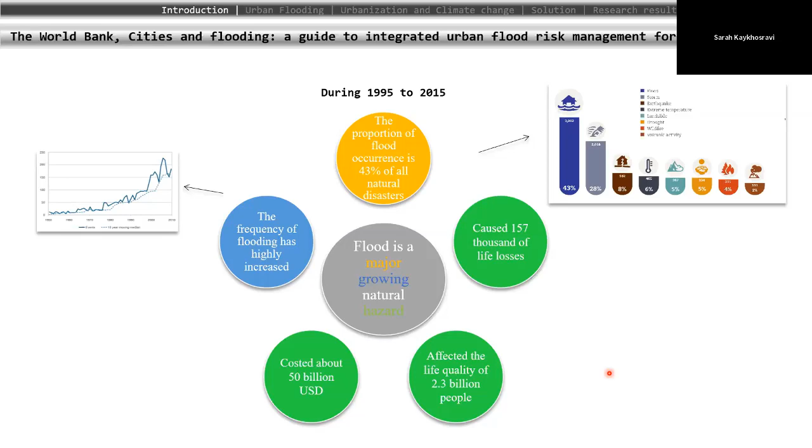And that could be around 50% of Canada's government revenue per year. One last bit of bad news is that this trend has been increasing during the last two decades of study, and it shows that it will keep increasing in the future. So the risk of flooding is increasing going forward.

Before I move to the next slide, I want to distinguish between different types of flood, specifically in urban areas. When we think of flood, usually what comes to mind is river flooding. Rivers run, and when there is rainfall, it's okay. But when there's more extreme rainfall, the river plain expands and can drown the surrounding neighborhood and those close to the river embankment. While we are calculating flood risk, we calculate that floodplain.

But there is another type of flooding in urban areas that we might usually neglect, and that is pluvial flood, which is as important as fluvial flood. Pluvial flood is related to the stormwater collection networks. In urban areas, runoff and rainfall doesn't convey downstream only through the river - it also conveys through stormwater collection networks, which are pipes located underground that collect runoff and discharge it somewhere downstream, in water bodies, lakes, or elsewhere.

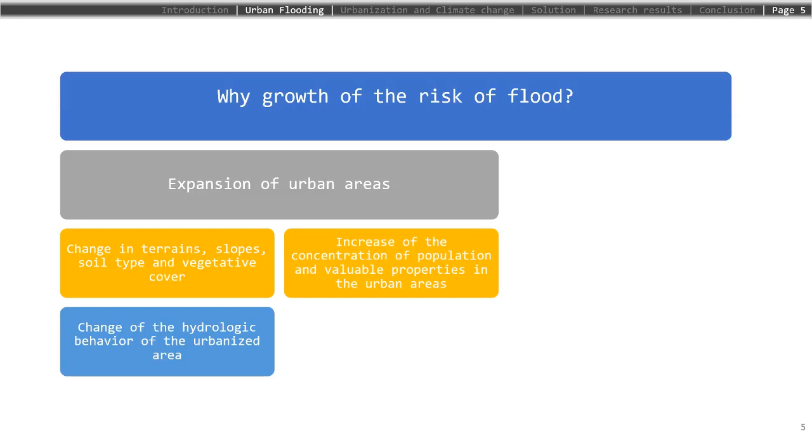In addition, there is an increase in concentration of population in urban areas. With urbanization and building cities, we concentrate population and properties in a specific, limited area. So when flooding occurs, because the concentration is high, the loss of human lives and properties would be higher.

Another important driver, which I'm sure you've heard of before, is global climate change. Climate change increases the temperature, and that increase in temperature increases rainfall. An increase in rainfall leads to extreme floods, because after high rainfall events we have higher runoff, which remains on the surface and becomes flooding in rivers and in the pipelines.

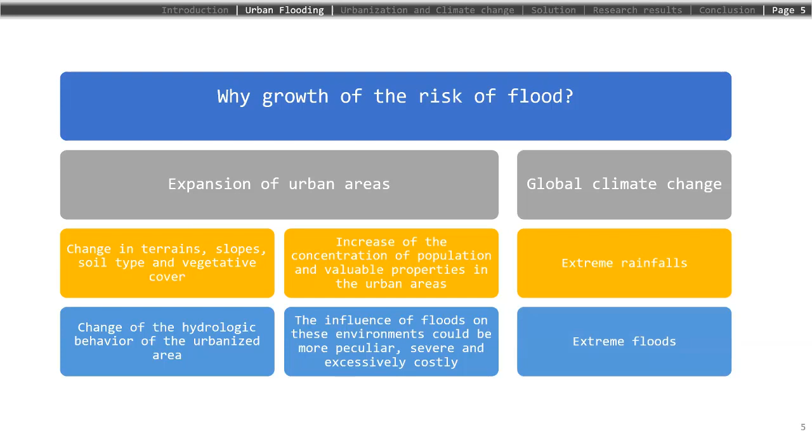Let's have a look at the hydrological cycle - this is a simplified schematic of the hydrological cycle of an area.

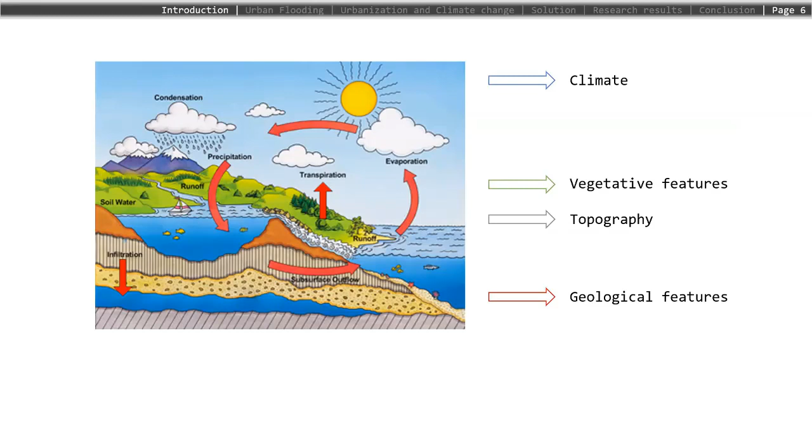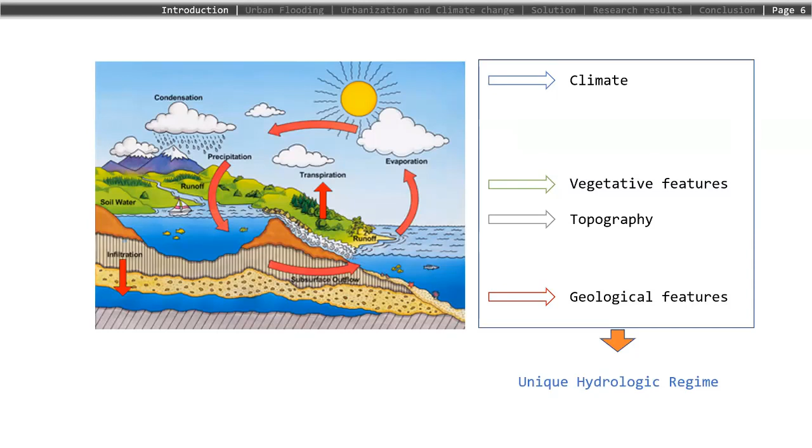With this hydrological cycle, we know that the unique hydrological regime of an area comes from different factors: the climate, the vegetative feature of that area, and the slope and topography. With urbanization, we change two of these factors: vegetative features and topography.

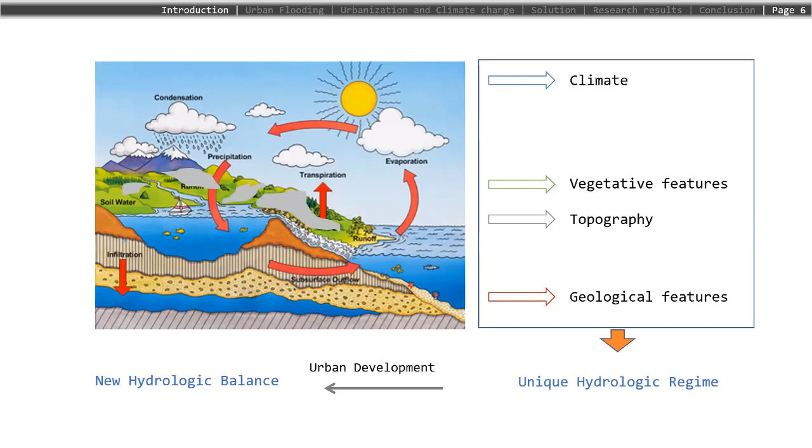With climate change, the other factor has changed too. So in all, we will see extreme rainfall and also higher amounts of runoff remaining on the surface. What can we do about it?

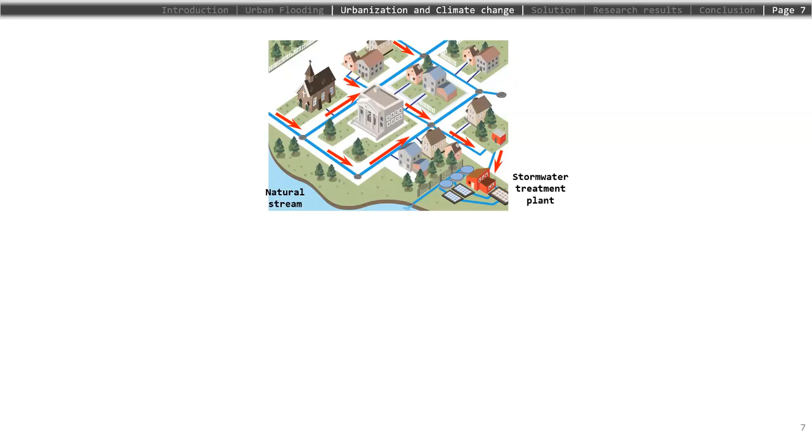One traditional approach to manage the extra runoff is stormwater collection networks. What these networks do is collect runoff from the surfaces through inlets. You've probably seen one in front of your house — little gates in the street that, when it's raining, the runoff goes into, and this runoff is carried downstream and discharged very far downstream into natural streams, a stormwater treatment plant, or some designed location.

However, these stormwater collection networks, or SCNs, have been designed for years, from ancient times to now. They're well known and well documented, but there are some limitations and problems with them. One is that they are pipes designed for limited capacity, so when we have extreme rainfall, they cannot convey more than what they were designed for.

That is one specific problem related to these SCNs. With age, these pipelines can develop cracks, deteriorate, and age. With aging, they may encounter limited capacity due to blockage and sedimentation. All these aging problems can lower their capacity.

Also, one environmental challenge with these SCNs is that in the surface of urban areas there are pollutants, and with runoff and rainfall, those pollutants — from car grease to fertilizer and many others — can be washed off and collected through these pipes and discharged into streams. That is one other criticism toward these kinds of networks.

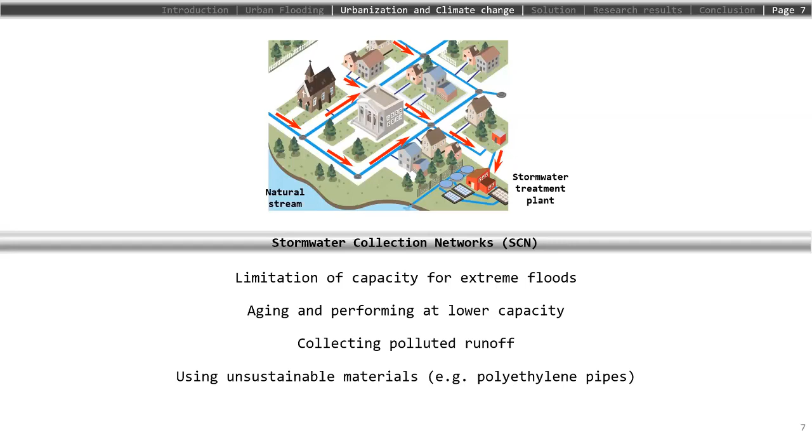Can we build lots of these stormwater collection networks? Can we add more and more pipes? What would be the smart solution to help runoff and flooding management and preserve the environment at the same time?

So, like I explained with urbanization — in the natural status of the environment, when there is rainfall, the soil is pervious and it's just filtered to the underground. The rainfall filters to the underground.

With urbanization, when there is rainfall, we prevent that natural infiltration process, so all or most rainfall remains on the surface. What we can do is use a solution called low impact development, which lowers the impact of development or urbanization through engineered, green infrastructure.

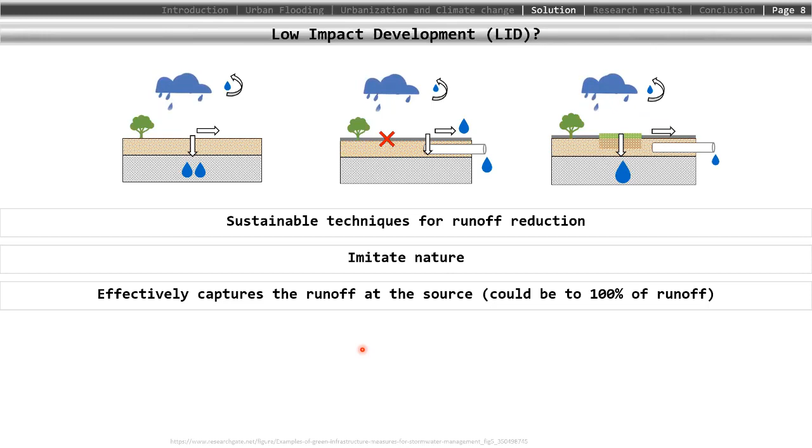This is a sustainable technique for runoff reduction that aims to imitate nature as it was before urbanization. We build infrastructure, mostly green, that captures the runoff and infiltrates it into the ground like before. It has been proven scientifically that it can effectively capture runoff at the source, so it doesn't accumulate and go into the pipe — because then the pipe has low capacity and we experience flooding.

Some examples of LID, or low impact development, are shown here. You may have seen many of them around your area or workplace. For example, the rain garden — designed to capture runoff. They may seem simple, but they have design criteria and engineering calculations behind them.

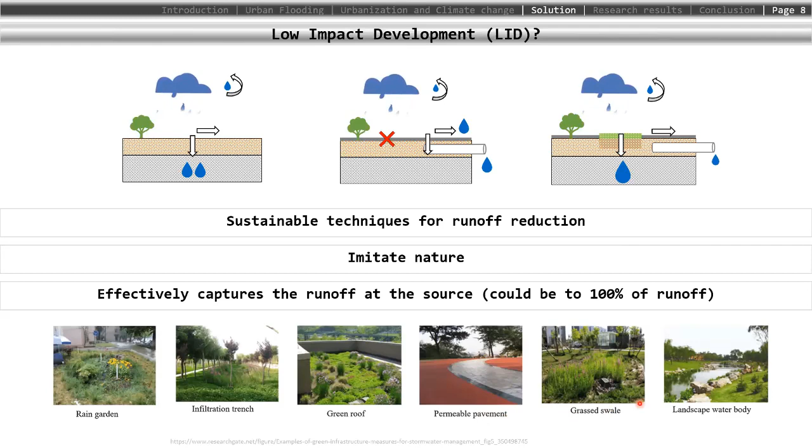There are other examples here: infiltration trench, green roofs — probably many media have covered green roofs in videos or photos. Porous pavement, which can infiltrate water into the groundwater. Also grassed swale, landscaping, water bodies, and so on and so forth.

One thing I want to mention is that these LID techniques are the solution after urbanization has already been done.

One key point I want to stress is that before we start development, we can do a lot more to prevent runoff and flooding. These are non-structural measures of low impact development, as opposed to structural measures used after urbanization. These non-structural measures include lots of actions we can take during development to lower our risk and society's risk to flooding.

I brought some examples here, like conserving natural resources and ecosystems through maintaining natural drainage courses. We don't construct over the natural courses or very close to them, and just preserve the natural courses as they are.

And reducing imperviousness. Let's say we want to build a parking lot. We reduce the imperviousness as much as we can by narrowing the width of that parking lot and leaving the rest as soil or other pervious material.

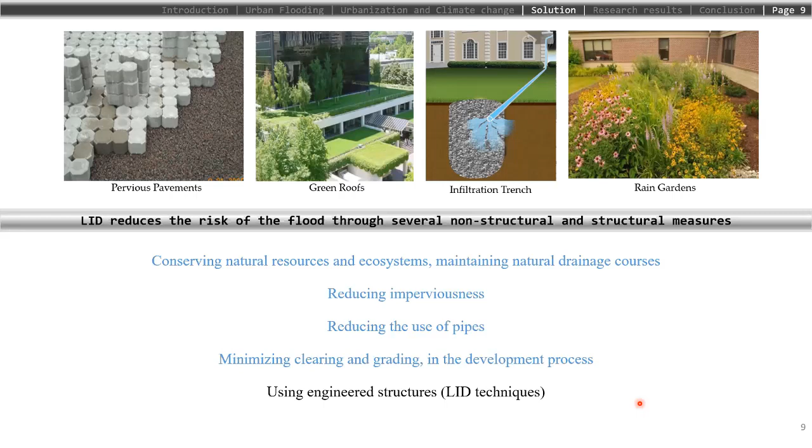And minimizing clearing and grading in the development process, so preserving the natural slope as it is, and stuff like that. There are lots of measures we can take to prevent flooding and runoff while we are developing.

This is an interesting part: these LID techniques don't only serve runoff reduction, they have many more benefits. The primary benefit could be runoff reduction, but there have been lots of studies showing that LID has positive socioeconomic effects around hospitals and educational institutes. It has been proven that LID can improve the health status of patients and improve educational outcomes, and it could be considered an amenity.

It could be a golf course or a green space for us, and it can increase the value of the properties around them.

Also, it comes with lots of environmental benefits, and these are numerous. I've listed some here, like they could decrease air pollution and also help water quality. Before, I mentioned that the stormwater collection network collects polluted water and directly discharges it into water bodies. But with the use of LID, you could have infiltration of water and improve water quality. It can also affect biodiversity, connect habitats, and provide benefits like that.

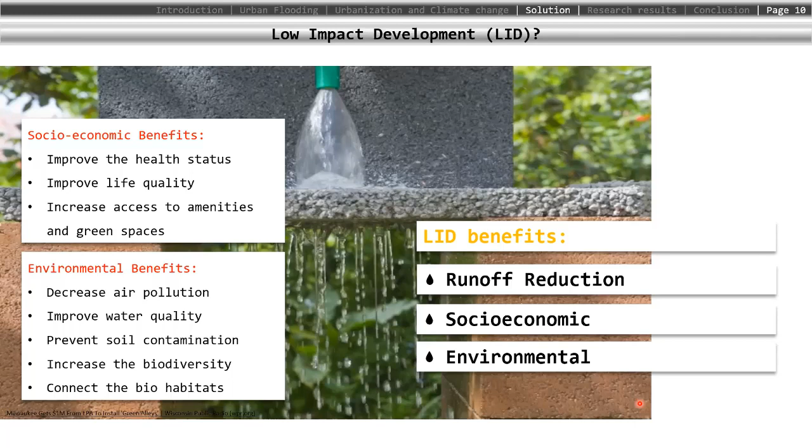Now that we know LID has several benefits, and we know that when we want to build infrastructure we are limited by budget, we need to make a decision. There are multiple types of LID, and at the same time we have multiple locations where we want to implement and build LID. So we need to think about what type of LID to use and at which location to implement it, to maximize social, economical, and environmental benefits, and also capture the most runoff.

I've done research on this, and it has been published in the journal Water. The link to the paper is in the title if you're interested.

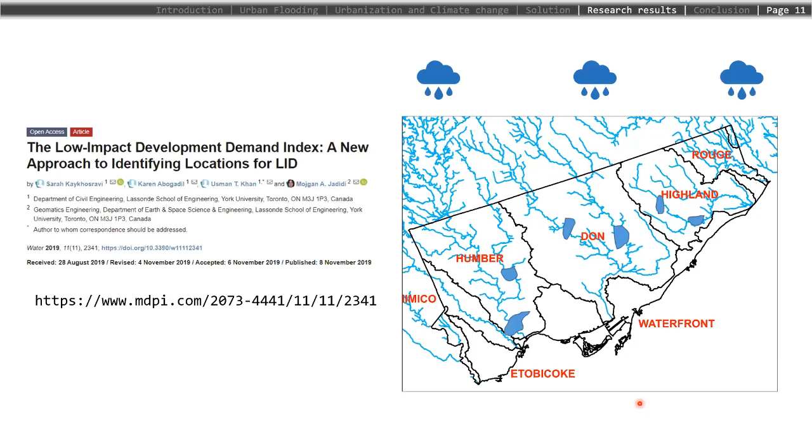In that paper, to answer how to prevent flooding if you want to implement LID, we wanted to create a map, for example for the city of Toronto, which was our case study. We wanted to generate a map that gives us the points that have the highest priority for LID installation or building.

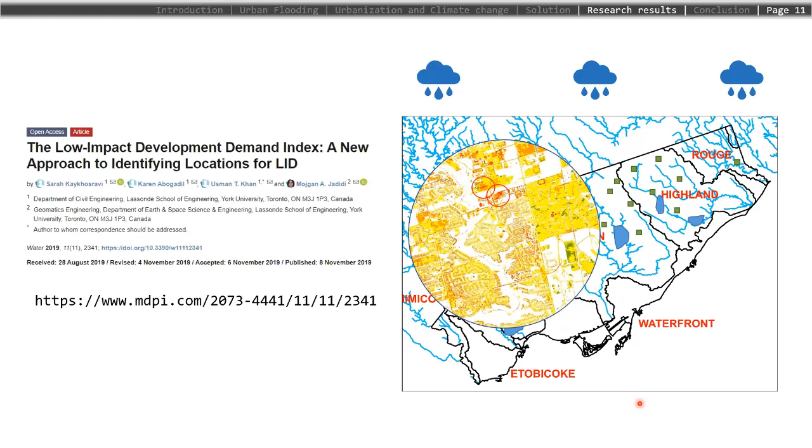I think my computer has frozen a bit, sorry.

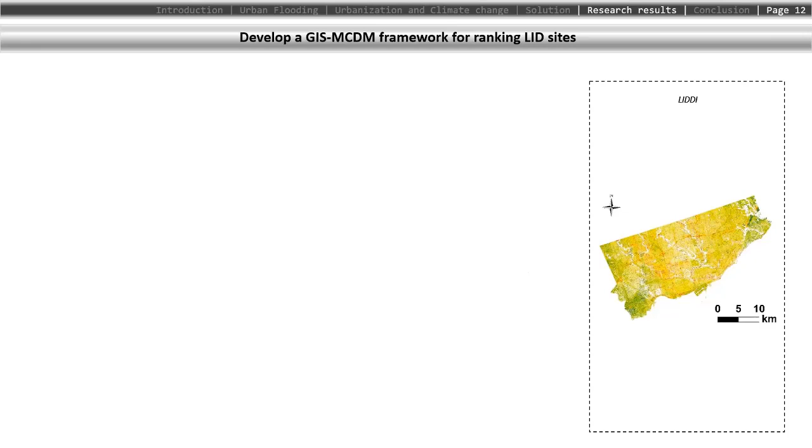This is the city of Toronto, and this is a map that we finally generated at the end of the research. How we came up with this solution, or this map, is interesting, and I guess it could change your view about how we decide where to implement LID and all the measures you need to take.

To generate such a map, we divided this big problem into three parts: the hydraulic benefit of LID, for which we generated an index; the socioeconomic benefit of LID, another index for that criteria; and also another index, a map that indicates the needs for environmental benefit of LID.

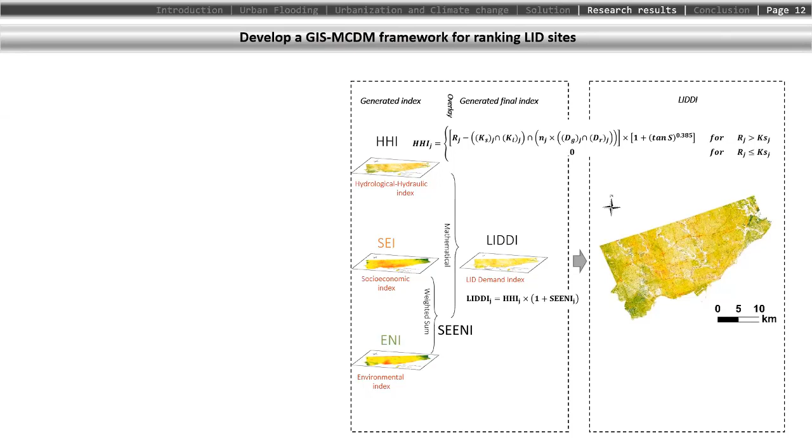These were overlaid and combined through different mathematical calculations, using a geographic information system integrated with a multi-criteria decision-making framework to come up with the answer and generate these three indices.

To generate these three indices, for each one we considered some basic criteria. For the hydraulic index, we gave priority to locations with the lowest hydraulic conductivity, meaning the locations that infiltrate rainfall water the least, and also with the highest slope, which is a factor that can increase the peak of the flow

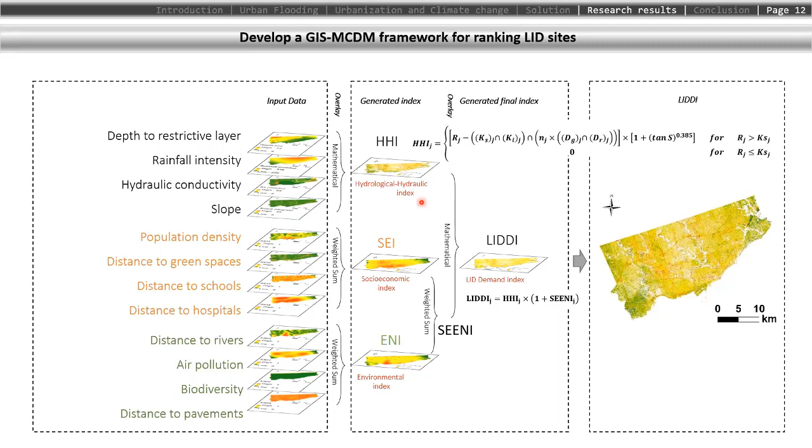during a rainfall. An example for socioeconomic is that we wanted the green infrastructure or LID to be close to schools, close to hospitals, so we gave priority to locations where we have less green spaces. In terms of environment, we gave priority to locations that have higher air pollution, lower biodiversity, and criteria like that. These criteria are very case dependent, but these examples give us a view

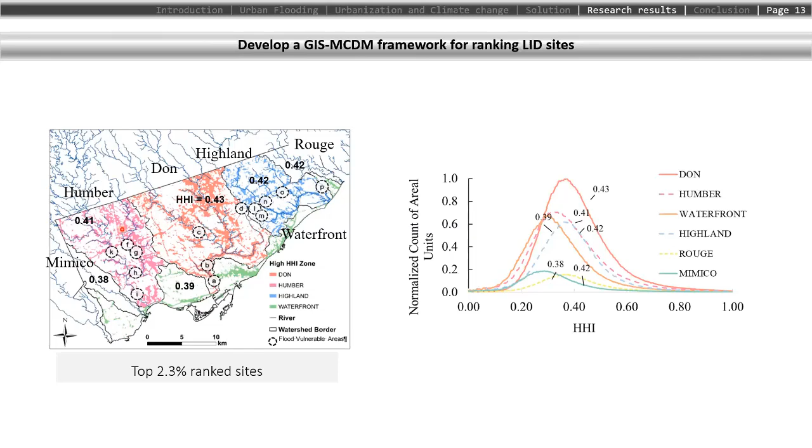If we look at the index distribution, we could see that in the Don watershed we have a very high need for LID, the graph has a higher mean. If we ranked all the watersheds in our study area, we could see that Mimico has the lowest. So Don and Humber are more critical in the city of Toronto in terms of runoff generation, and they are more urbanized in that sense.

This slide brings me to the end of my presentation, and I just had a few key messages from this presentation that I want to deliver.

One is that if you're afraid of river flooding, be as afraid of manhole flooding and basement flooding. They're equal. If we have extreme rainfall, the possibility of flooding in both is the same.

Also, LID can reduce the risk of runoff in urban areas very effectively. Take it seriously, it is a very important and effective solution.

And remember that it's not just serving runoff reduction and flooding, it is serving society and environment at the same time. Also, before we start development and urbanization,

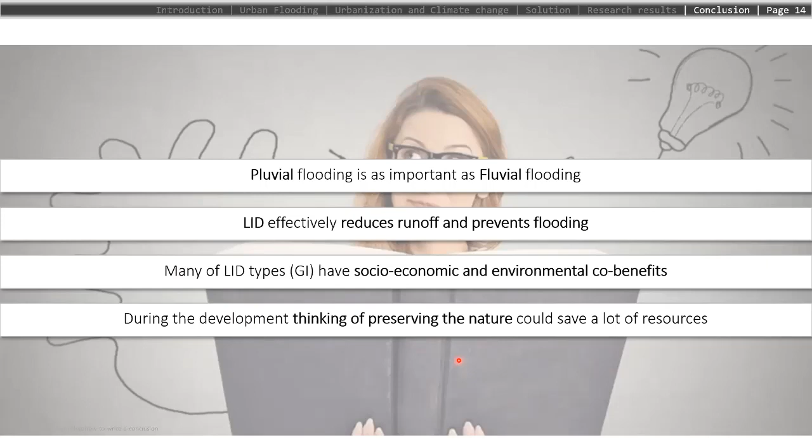I want you to think of preserving nature. That could save a lot of resources, a lot of financial resources, and prevent lots of flooding. Thank you.

And I would be so glad to take any questions, if that is the question time.

I think we'll go to Gord's presentation, Sarah, and then we'll do questions at the end. That's okay. Okay, great, thank you. Thank you.

Over to you, Gord. So what we're going to do now is carry on from Sarah's presentation on overland flooding and some of the considerations around our sites and our buildings, and follow on with a little bit of discussion around buildings specifically.

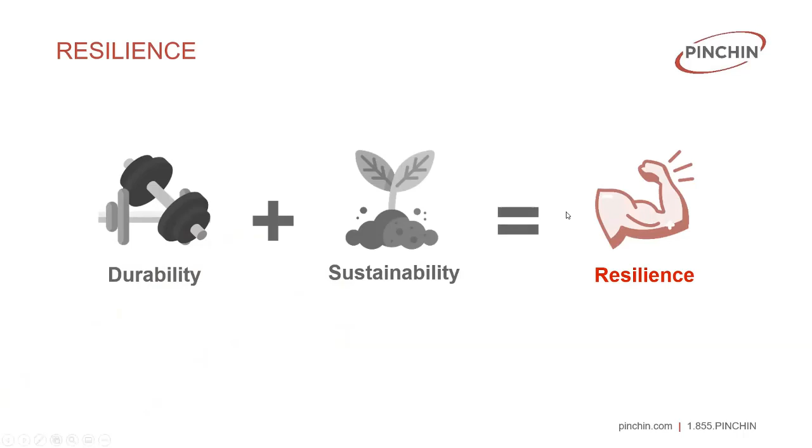Before we get into that, we need to understand our definition of resilience or resiliency: if you can create something that's durable, add to that with some sustainability in mind, you will ultimately become resilient. It's with that perspective that we're going to give our presentation.

Sarah's talked a great deal about overland flooding, and now we want to introduce you to what we call the infrastructure risk assessment. What's the process for discovering where your vulnerabilities may be with respect to things like overland flooding? Risks are why we do this work.

Many codes are based on historical data and do not reflect future risks, including the impacts of climate change. Sarah mentioned that existing infrastructure for stormwater management has been underground for many, many years, and it may no longer be sufficient to handle the future capacity required, the future volume of water that may result from climate change.

When we look at risks, we're looking beyond flooding, at the interior of the building, the mechanical systems. Stormwater management systems may not have the capacity to drain sites. We also look at things like the roof on the building, in terms of whether or not it has capacity for rainfall in the volume that might be forecast in the future.

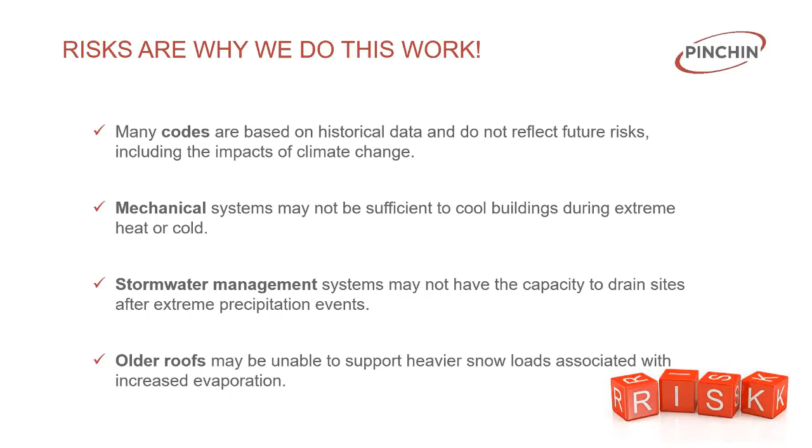We look at the way water can be prevented from getting into the building, whether it's from wind-driven rain or from flooding. We look at flooding and sea level rise and the impacts that has on the building structure.

Flooding and sea level rise can scour the structural elements, causing weakness. And then when flooding has caused impacts to the grid and the ability of the municipality to produce power, that can result in problems for continued operations.

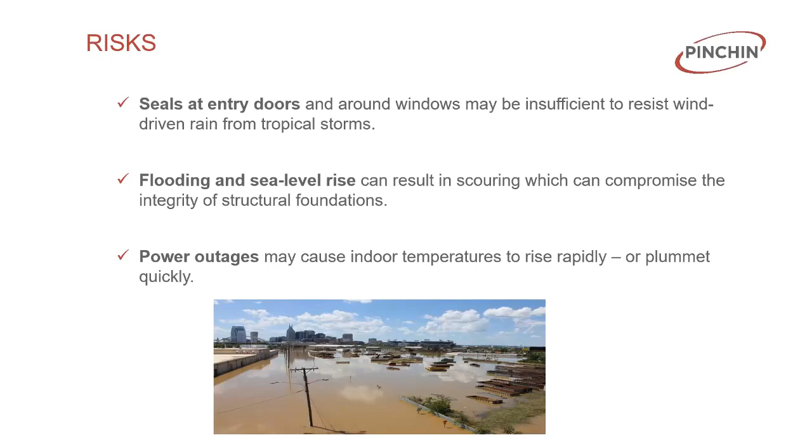So let's talk a little bit about infrastructure risk assessment. There is a protocol that is followed. One of the protocols we use is called the PIEVC Protocol, which was developed in concert with Infrastructure Canada, the federal government. This is currently sponsored by the Climate Risk Institute.

It's done in conjunction with ASTM guides for climate resiliency, CSA guide for durability, ISO 14091, and it fits and is in conjunction with BOMA BEST, GRESB, Fitwel, IREM LEED, and Climate Lens. A lot of these different terms you may be familiar with, but essentially this is the starting point for understanding where your vulnerability may be with respect to your infrastructure from climate change.

The risk assessment basically defines the why. Why are we doing this? Well, we want to avoid the effects of overland flooding and other such effects from extreme weather. So that's the why. The next part in the process is developing a risk profile for your site.

We do this in conjunction with climate modeling, climate science. We pick a site and time horizon. So we take the physical address of your infrastructure, and then we apply climate science modeling to that. And the output of that gives us information on where the greatest risks may be in terms of future climate change.

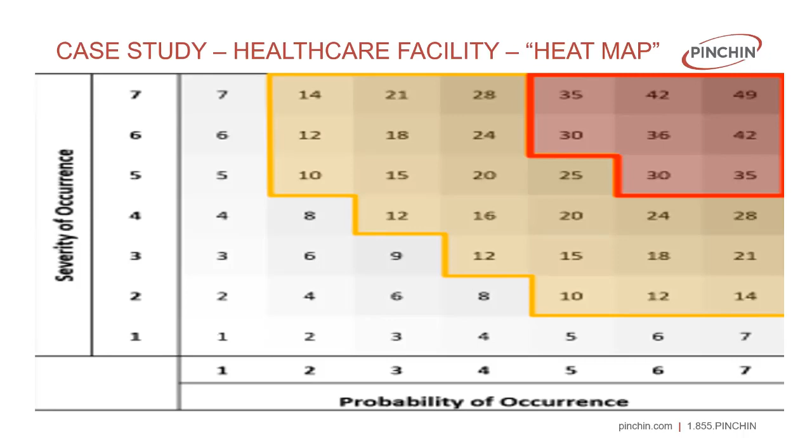So we take a look at each infrastructure system, and we apply a scoring from 1 to 7, with 7 being an occurrence that's quite severe. And similarly, we do that on the probability side from 1 to 7. The higher the multiple, the greater the concern. So if you've got items that show up in the red square area, these are areas of further focus from a recommendation and mitigation standpoint.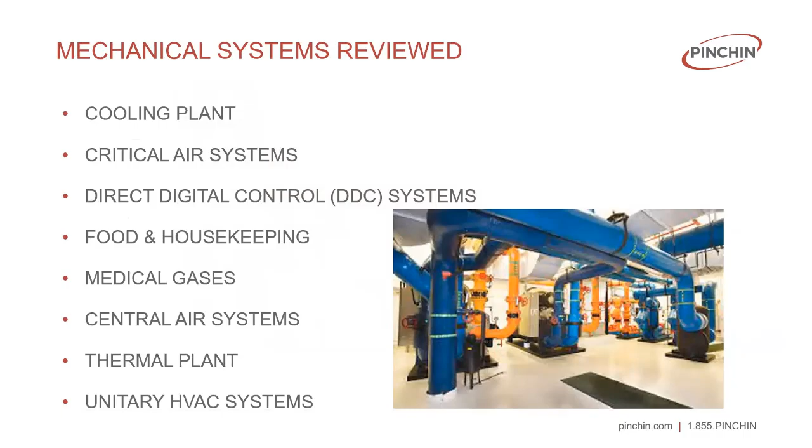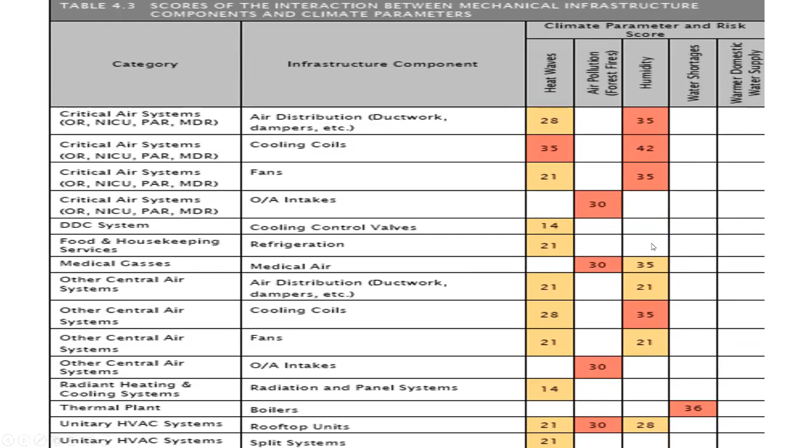So here's an example of what we do on the mechanical side. We basically look at the infrastructure and make an assessment. We create the heat map based on the workshop and the data gathering, and out of that we arrive at the scoring that you see. So just different examples, and then ultimately we create a report with recommendations.

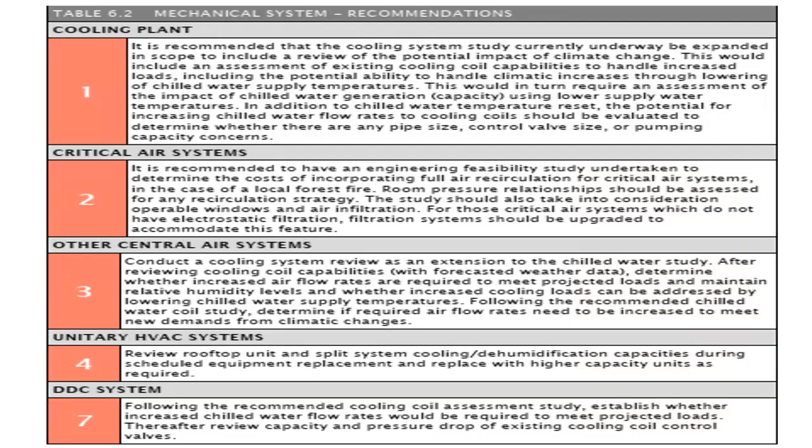So the output of that assessment provides the conclusions. The conclusions will say that your site may be vulnerable to overland flooding. And then we have to decide with the client how best to respond to those conclusions. And so this is where we get into implementing adaptive measures.

Once we have the basis of understanding of where the climate risk is, it becomes an engineered project, if you will. We create the design, follow the tender process, and then get it built and commission it. But the first part is understanding where the risks are.

Here's some trends that we're seeing in Canadian facilities. This is what owners of infrastructure are thinking in terms of climate change currently. They're looking at distributed energy resources for information systems, so the impact of climate change is such that being able to maintain your information systems in times of extreme weather or outages is critical.

Obviously, power failure is a big issue. So if your hospital, for instance, were to suffer a flood that impacted the ability of the grid or even the building itself to generate power, what would that look like for the continued operation of that particular facility?

We are also considering other things like seismic resilience. And then the other thing that's become quite apparent in Canada is that building codes are not keeping up with the impacts of future climate change. So working together with government, federal, provincial, and municipal, to ensure that building codes are keeping pace with future climate change. Sarah mentioned low impact development, so having the capacity within code to ensure that future development takes this into account, making sure that we're doing what we can in advance of what climate change forecasting is telling us through code.

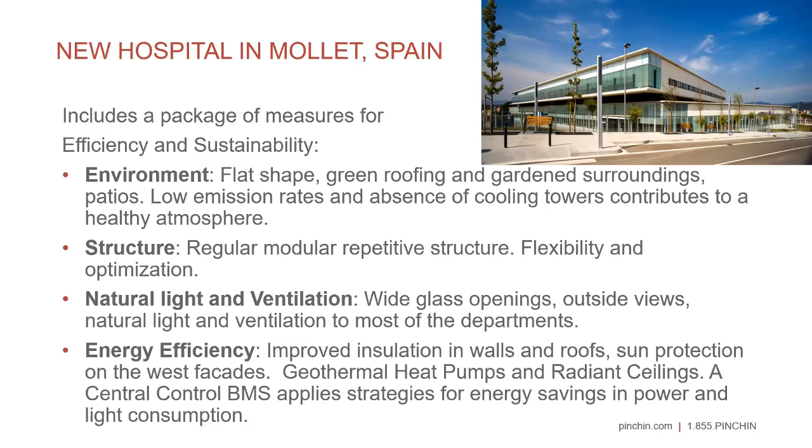Here's an example of a brand new building, a hospital in Mollet, Spain, where the design takes into account all sorts of different aspects that involve both sustainability and resiliency. Nothing specific to flooding, because that wasn't a big concern in this area, but here's an example of how new design is being modeled around the subject of climate change and adaptation.

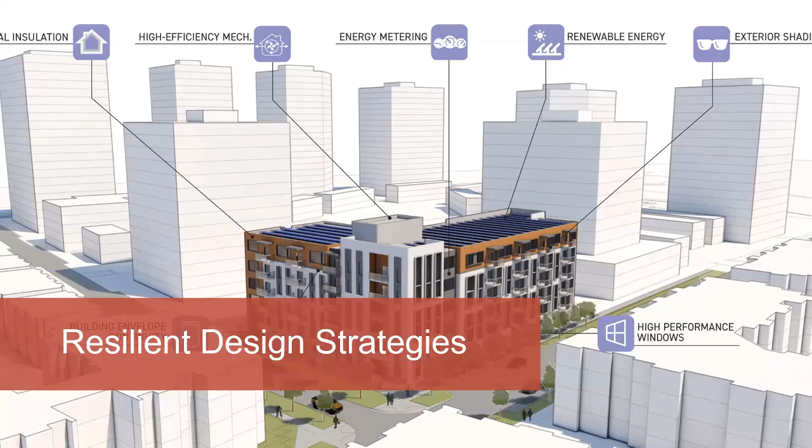So resilient design strategies, as Sarah mentioned previously, must take into account from the vulnerability assessment how best we can prepare our infrastructure for future impacts, whether that's through the building envelope, the site characteristics, the site designs, or how we plan to continue operating the building during adverse or extreme weather. So incorporating different features in the design and planning of the infrastructure in response.

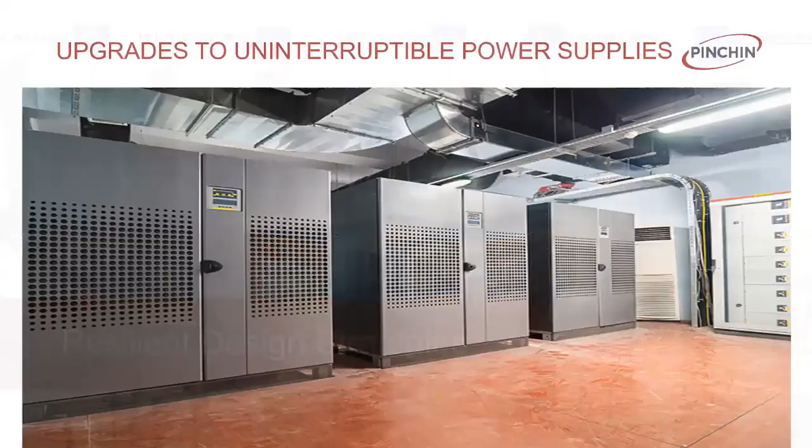This is an example of a brand new development, but it could be for buildings that are already in place. One key focus is making sure we are able to continue to operate should the grid go down. If the site area is flooded, if the city becomes flooded, how can we continue to operate under these extremes?

Some of the design features that are cutting edge for buildings around this subject include incorporating things like building integrated solar technology or photovoltaic cells in the cladding and roofing. Basically, if we can harness the power of the sun to help operate systems within the building during situations where the grid may be temporarily compromised, it will allow us to survive those impacts longer.

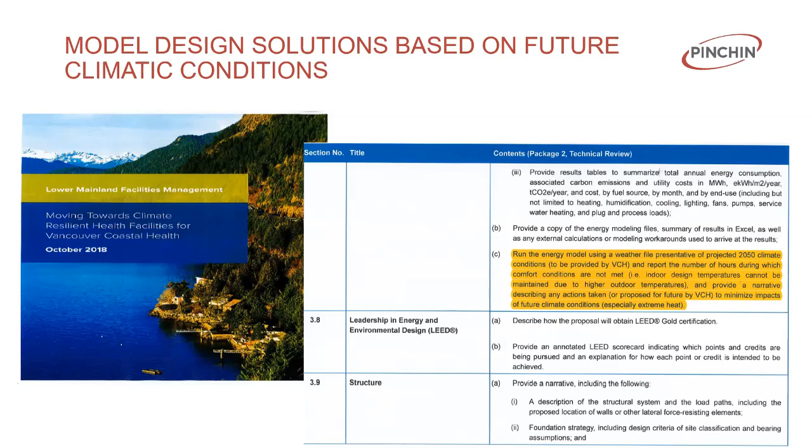Modeling for future weather. Here's an example of a requirement through an RFP from a healthcare facility or provider in the lower mainland of British Columbia, where they're asking designers to contemplate future weather in their designs. We're seeing more and more of that.

Maximizing daylighting is part of the resilient design principles we're following, where resilience has to transcend scales. Resilient design incorporates and protects natural environment and resources, anticipates interruption and adversity, and involves simple, passive, and flexible systems using durable materials. We try to incorporate locally available renewable resources, and we have an abundance of diverse and redundant systems.

Sarah mentioned issues with current municipal stormwater management. What we have come to understand is most municipal infrastructure is currently not designed for the kind of outflow from sustained rainfall, for future sustained rainfall. So some of the things we're thinking about is whether there's an opportunity to store rainwater on top of things like the roof of your building or on your site.

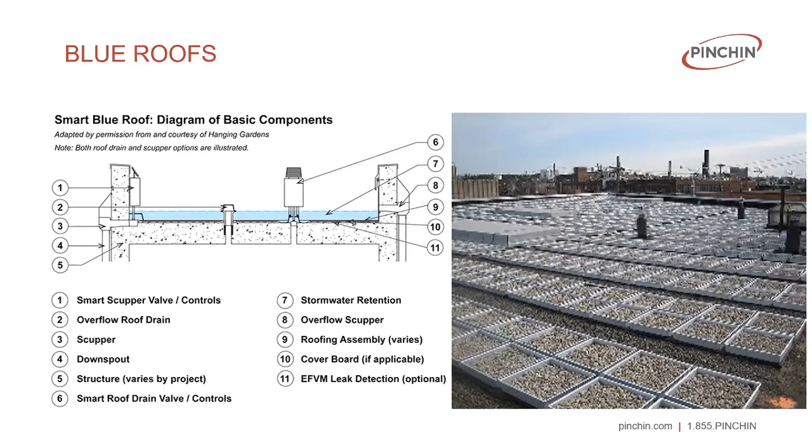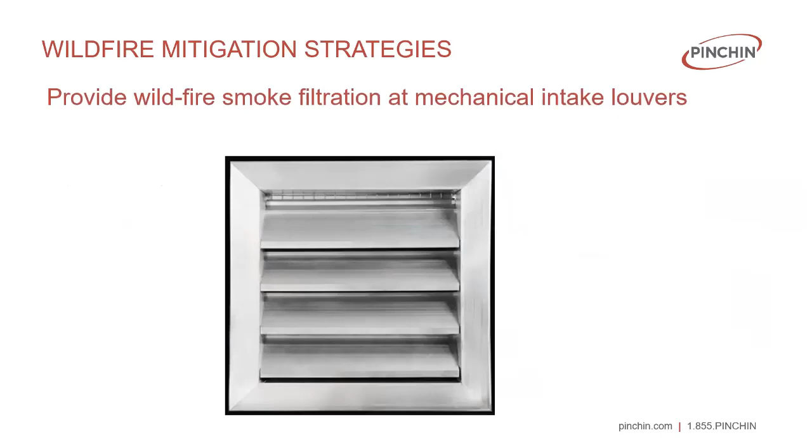We also get into things like wildfire mitigation, which isn't really the theme of our talk today, but using fire-resistant materials and keeping smoke from getting into your building, looking at different features to protect the building enclosure.

Other elements protect the critical systems inside, hardened ductwork and such, well inside the exterior envelope of the building. By designing the shape with the anticipated sea level rise or overland flooding that may come, we're anticipating that this could be an issue, and so we're protecting the building and its critical elements, including the occupants, from that eventuality.

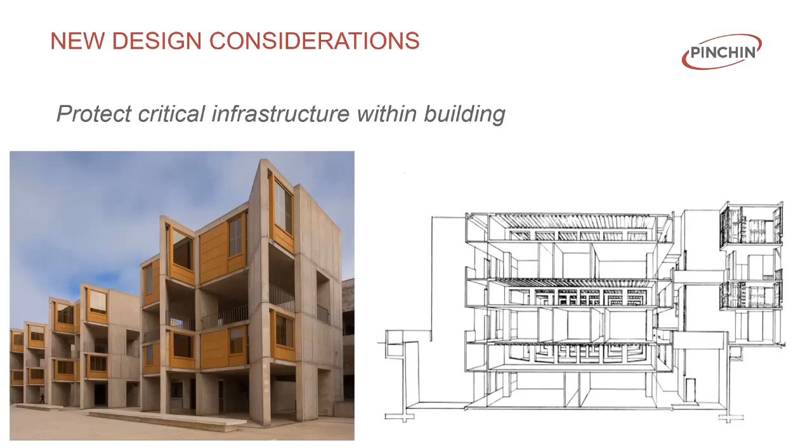We know that when we get severe rain, we also may have hurricane-like winds. So strengthening the building in places in North America where we typically did not have to think about these things, to the extent that we do now.

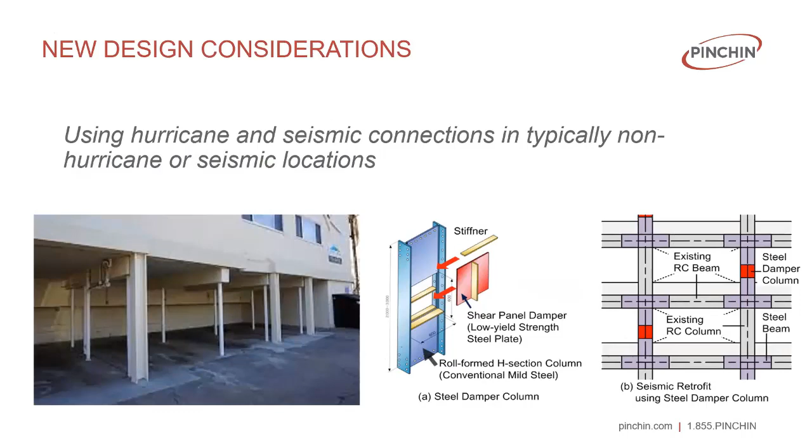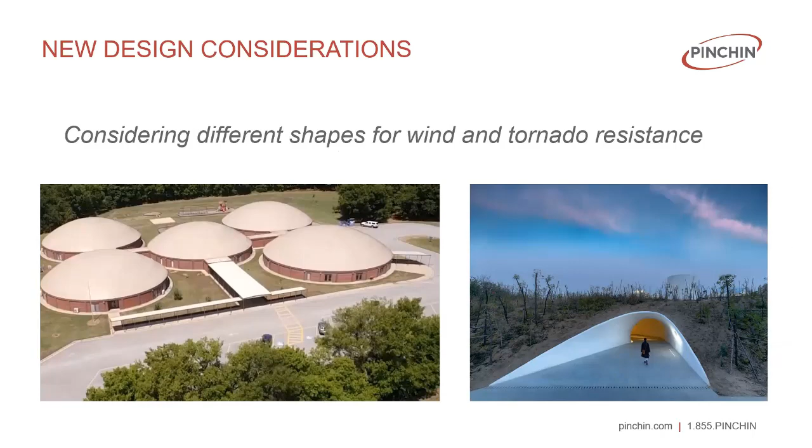Here's some examples of strengthening the infrastructure against extreme weather effects, considering different shapes. We know that if high winds are an issue, we try to create shapes that will be more resistant to the impacts of tornadoes and high winds. Where overland flooding isn't as great a concern, we locate infrastructure below ground.

In the example to the right on the screen, this is a hospital constructed in Boston, Massachusetts, where they anticipated, because of the location of that hospital, that there would be concern from overland flooding. So in spite of what you see, the building has been designed with overland flooding in mind, and all of the critical elements necessary to operate that building are located well above grade level. The building has been designed with overland flooding as a prime consideration of climate change.

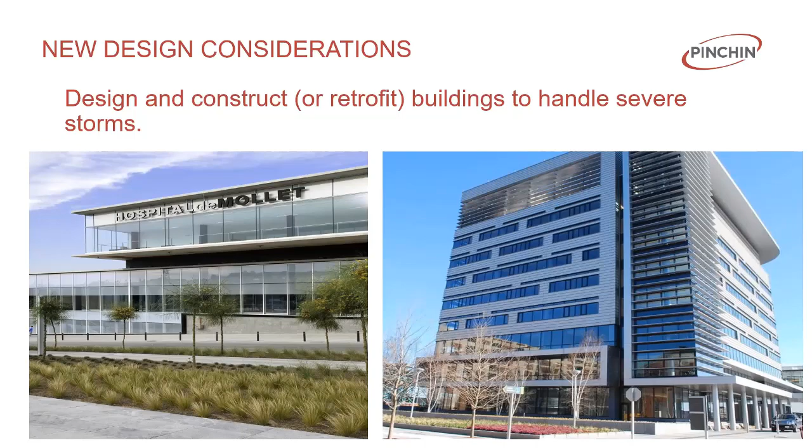We don't know for certain what the extreme effects of climate change might be in 10 years from now. So it's important that we periodically revisit conditions so that we put our clients, our people, and the safety of buildings and people first, and make sure that we are as prepared as possible for what may come.